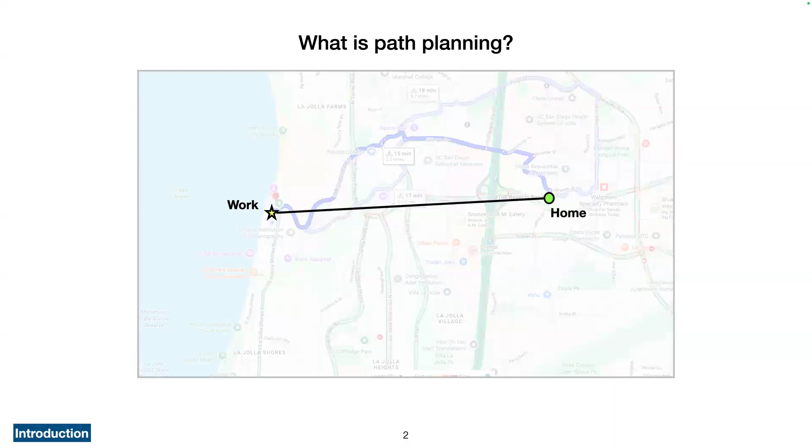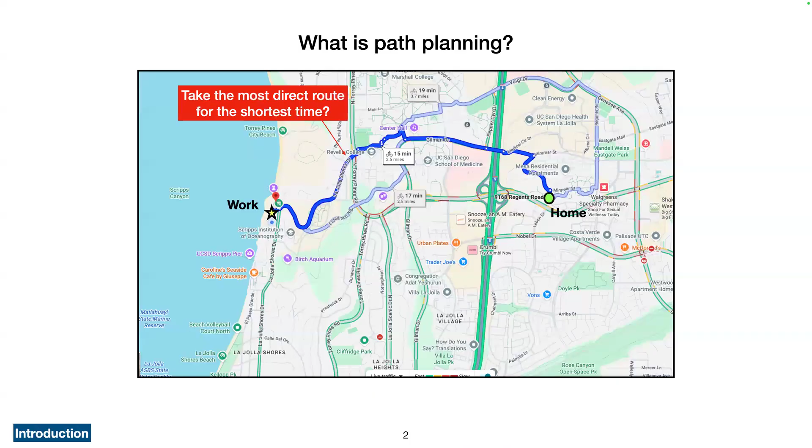If you're not familiar with path planning in the ocean, you might actually be very familiar with it in your day-to-day life. Every day when I wake up over in grad housing, I want to get here to Scripps in the fastest way possible, but I can't necessarily go in a straight line. So maybe I'll ask Google Maps how to get there, and this is the way I usually take. It's the most direct and it's the quickest, but I could also think about optimizing for something else.

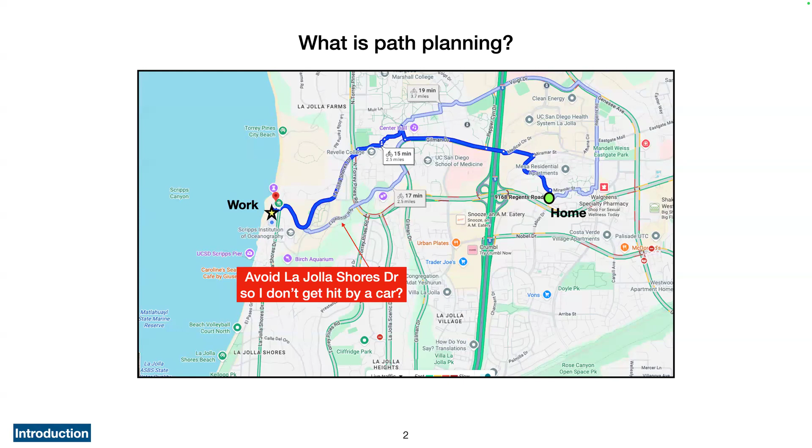Maybe I want to avoid the most congested parts of campus, or maybe I want to take some side roads to avoid traffic. Either way, I have different options to get from point A to point B. In the ocean, we have the same problem, but instead of dodging cars or switching streets, you have to deal with moving through a fluid that is in itself moving.

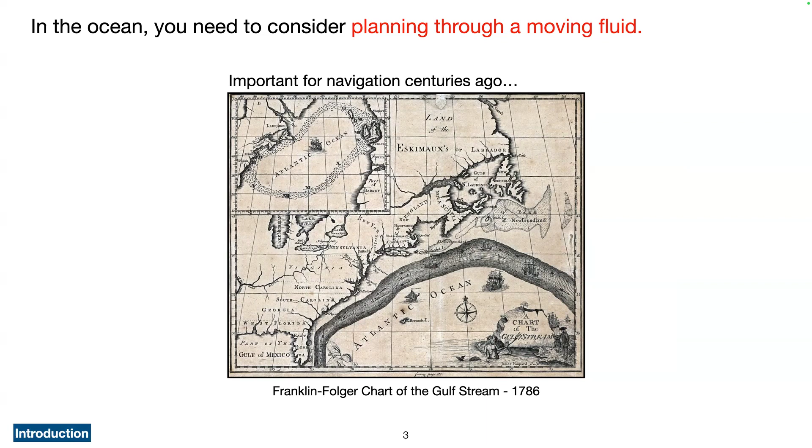This is a problem we've been thinking about for hundreds of years, and this is actually a chart from Ben Franklin back in the 1700s, where he was corresponding with local ship captains, talking about how they could use the Gulf Stream to more efficiently navigate between the US and back to England. On the way there, you might want to ride through this current, and on the way back, most importantly, you want to avoid it so that you can make way and be efficient.

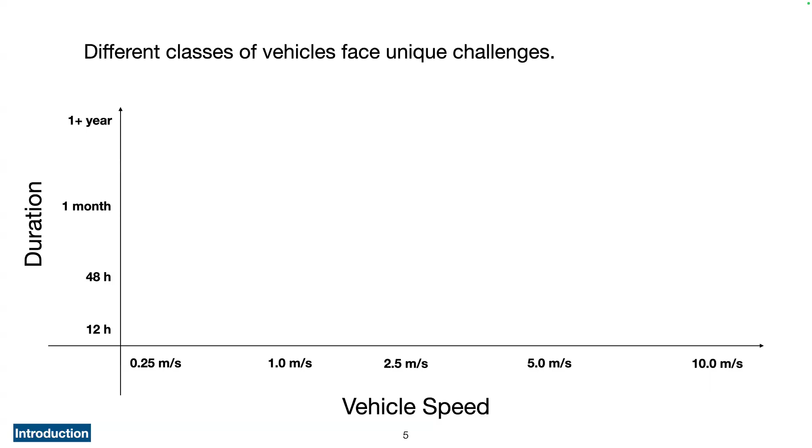When we think about planning, we also want to think about which vehicle we're considering for the problem. We can classify vehicles by their speed on the x-axis and duration on the y-axis. Planning for something like a container ship that's going very fast and might be out for about a month is going to be very different than piloting an environmentally propelled system like a wave glider or Slocum glider, which you can see on the top left, where they're going less than a meter per second, but can be deployed for over a month and up to over a year.

What we're going to focus on for most of the talk today is a propeller-driven AUV. These are vehicles that are a little bit more agile than environmentally propelled systems, going nominally about a meter per second. They can be deployed for around anywhere from a few hours up to 2 days.

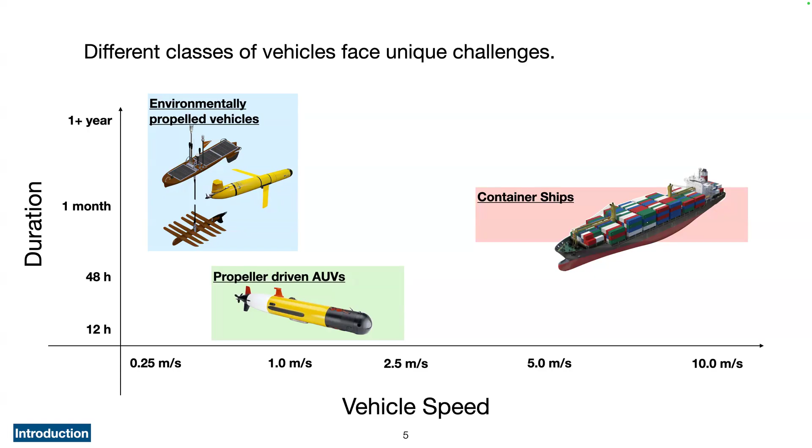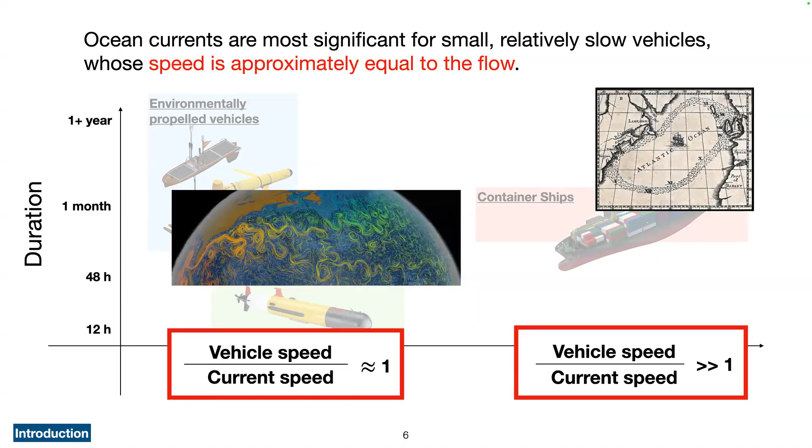This is because we need to think about how fast they're going with respect to the ocean currents and how we might need more information given these slower vehicles. For a container ship, or back in the day where a vehicle is going much faster than the current speed, planning is maybe not as hard or not as interesting. But here, where the vehicle speed is on the same order of magnitude as the currents, we can really start to care about all this small scale dynamics in the ocean.

We're talking about planning through a vector field, so either wind or ocean currents, which represent a flow that changes over space and time. He talked about a ship that moves with constant velocity relative to the surrounding air mass. Our vehicle or ship, its velocity is going to be the sum of wherever it points, plus the ocean currents at that position. Then the goal is: how must the ship be steered in order to come from a starting point to a given goal in the shortest amount of time?

We're still using this almost exact problem formulation with two material changes. First, we're going to be considering vehicles that have control over their velocity, so it can choose both its direction and speed through water.

This naturally leads us to talking about paths that minimize energy. If you want to get somewhere in the shortest amount of time, you'll drive the vehicle as fast as it can go. But if we want to minimize energy, we might speed up or slow down depending on what the ocean currents are doing around you.

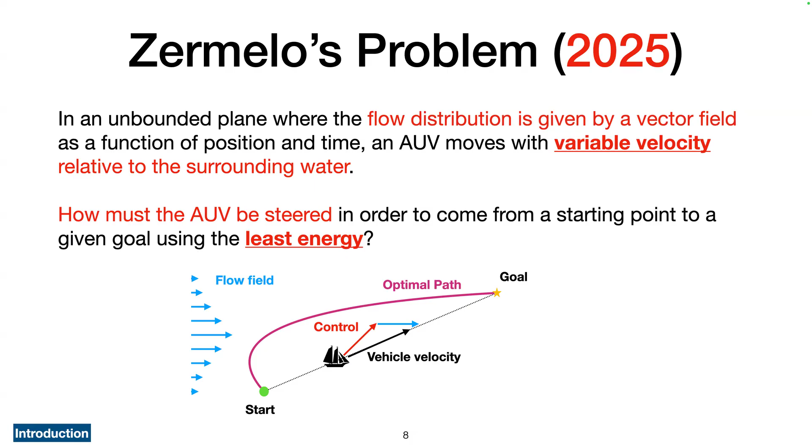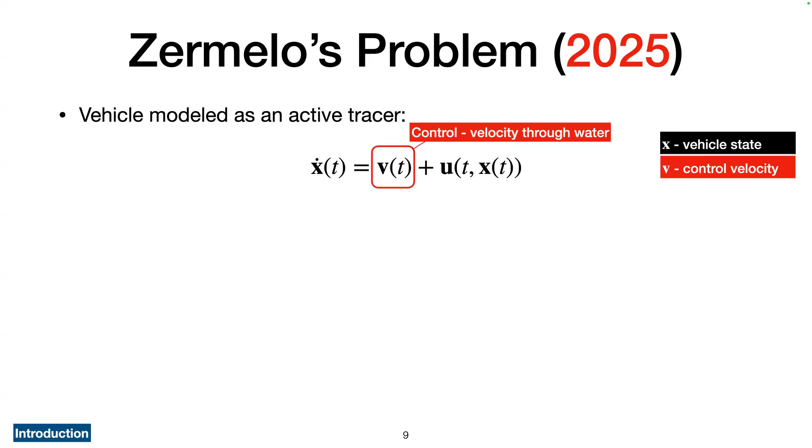If we state this more precisely, the vehicle's state or position x, and therefore its velocity, is the sum of v, the control, with the ocean currents. That might be a function of time, as well as the position the vehicle is at.

We're going to consider an energy consumption model with two terms. The first is dynamic energy consumption, changing as a function of time based on what you're controlling. That's the magnitude of v to the power of 3, scaled by alpha, the dynamic power coefficient. This is a function of vehicle geometry, so hull size, drag coefficients, things that can be calibrated to a specific vehicle.

Beta is going to be a term that's constant in time, representing the hotel load — all of the power you need to keep a system up and running, be that command and control, onboard computing, or other sensors.

The problem we're solving is to find V star, the optimal control as a continuous function of time, which minimizes total energy consumption. We're integrating from the given start time to an unknown end time, but we specify where the vehicle starts and ends.

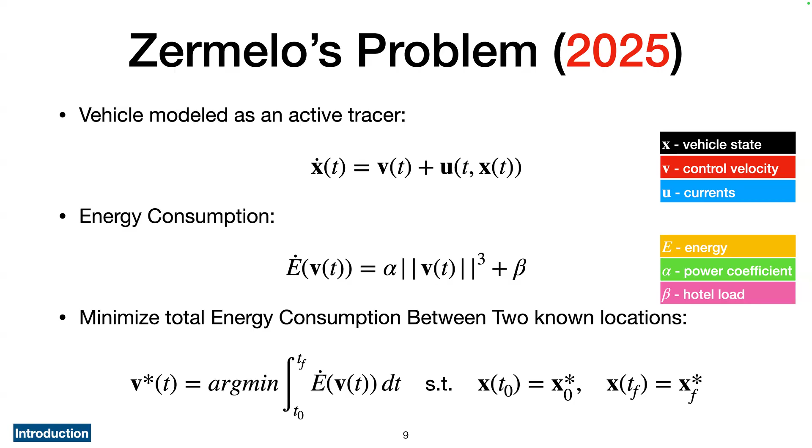This is a very well-studied problem. In the last 10 years or so, there's been a lot of development finding solutions using complicated partial differential equations that govern the evolution of what we call a level set.

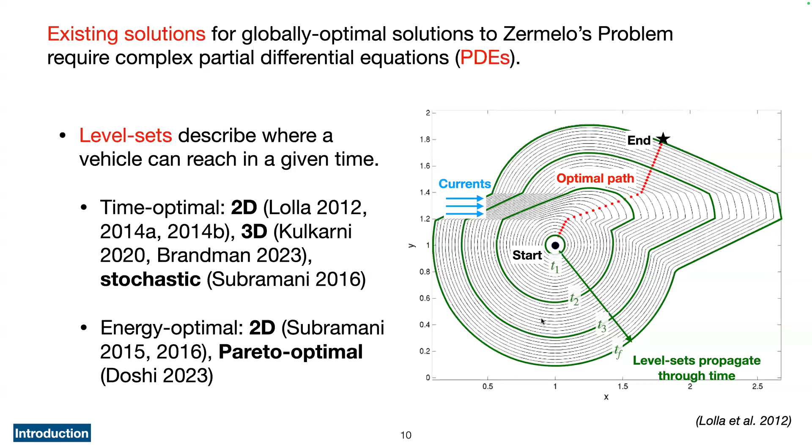These have been developed a lot over the past 10 years, starting by Lolla et al. in 2012, and they've been extended to three-dimensional currents, uncertain currents in 2D, and more recently to energy-optimal solutions, both in 2D and for a Pareto optimal solution trading off between time and energy.

Why they've been so successful or widely adopted is because they're very rigorous — provably optimal and complete, meaning that if a solution exists, the algorithm will find it, and it's guaranteed to be globally optimal. It'll give you back the path that is much better than anything else.

Another way to approach this problem is by formulating our solution in the form of ordinary differential equations, or ODEs. This is the technique we're going to be talking about a lot in Chapter 1. The major pro is that they're much more computationally straightforward.

We can shoot all of these out in parallel in a much more straightforward fashion, and we can find an optimal trajectory like this red option that starts from the starting point and then reaches our desired goal point.

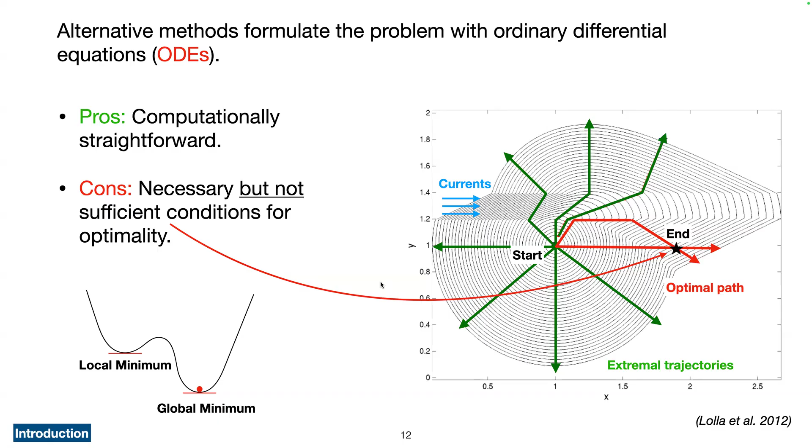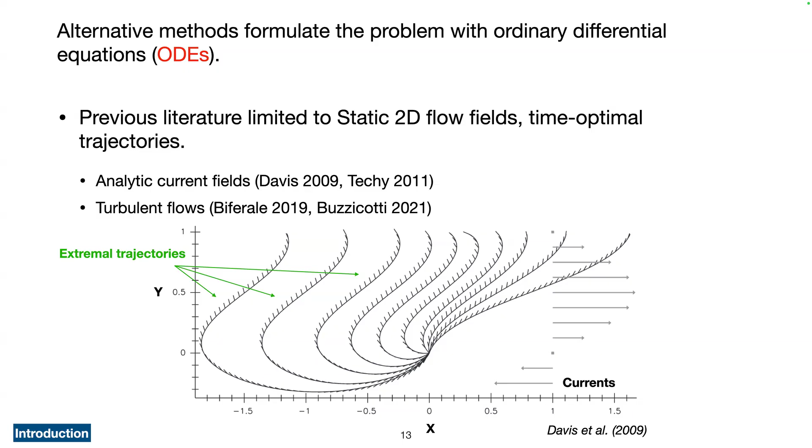These have been studied in the ocean, but in a much more limited sense with respect to the level sets. This is a very nice figure from a nice paper of Russ Davis here at Scripps a while ago, where he demonstrated these methods in analytic current flows or flow fields. So far, they've only been developed for static two-dimensional flows and for time optimal trajectories. We're going to build off of this in the first chapter that I'll share later.

The methods we've discussed so far require global information about the environment. So if we look at the schematic below, we know about the currents everywhere, including forward in time. We might know where there are obstacles like islands or keep-out zones. With all of this information, we want to be able to find a globally optimal path. Practically, this is useful if you have a good forecast, right? So you need to be able to trust your forecast explicitly.

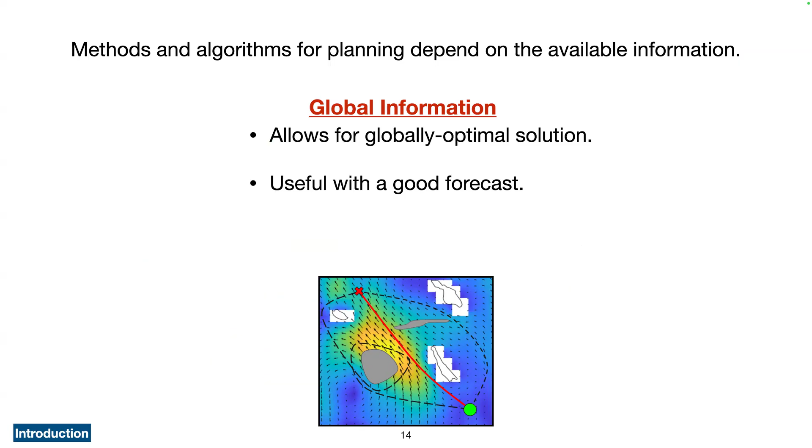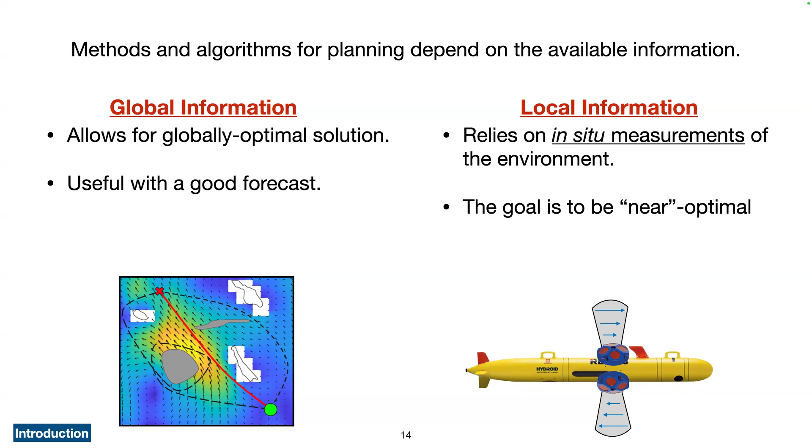On the other hand, if you're operating in an environment that doesn't have a forecast, or doesn't have a forecast you trust very far into the future, you want to make decisions based on local information, allowing you to still be intelligent when you can only sense the currents from the vehicle. In this schematic, we have an AUV equipped with an acoustic Doppler current profiler, which might allow you to measure the currents in situ. Because you don't have all of the information, we want to develop methods that are near optimal, but of course they're most likely not going to be as good as the globally optimal solution.

With a little bit of background, today I'm going to be presenting three chapters of my thesis, all on this problem of energy optimal trajectories for point-to-point transit. The first chapter is going to be focused on globally optimal solutions, extending those ODE-based methods we talked about a little bit before.

Then in chapter 2 and chapter 3, we're going to move towards onboard planning. In chapter 2, we're going to do this with a machine learning, data-driven framework, and focus on planning in horizontally varying currents, so a vehicle either at the surface or at a constant depth. In chapter 3, we're going to design a behavior that's more motivated by the sensing capabilities we have on an AUV today, and think about how we can plan vertically, taking advantage of how ocean currents vary as a function of depth.

So if we start with chapter 1, titled 'Energy Optimal Path Planning for Autonomous Underwater Vehicles with the Maximum Principle' — this paper is currently in review at IEEE JOE. What we're going to rely on for this work is a classical tool from optimal control called Pontryagin's maximum principle. The main thing I want you to take home is that this method is going to enable us to formulate our problem as a two-point boundary value problem for ordinary differential equations. So PMP is going to tell us what differential equations to solve, and numerically we just want to find these boundary conditions.

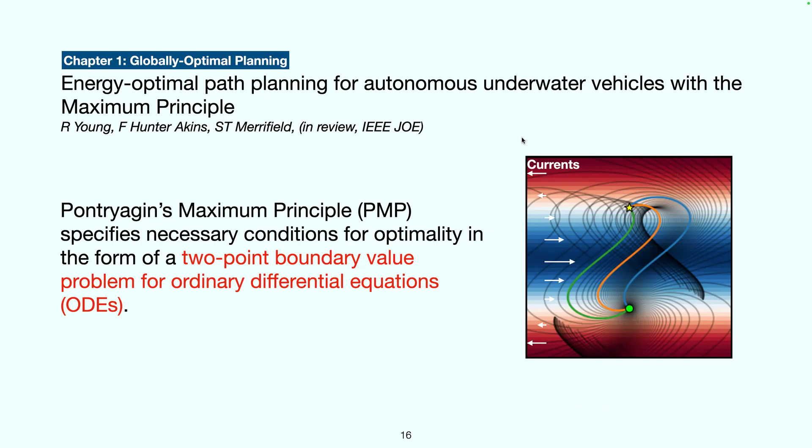We'll go through this figure later, but keep it in your head: if you can see my cursor on the right, we have a boundary condition at the start — the green dot — and we're trying to find trajectories that get up to the yellow dot. We have ordinary differential equations that are going to govern all of these shaded gray lines in the background. We want to find the trajectories that connect the two points, and then we'll be able to evaluate those for which one is our globally optimal solution.

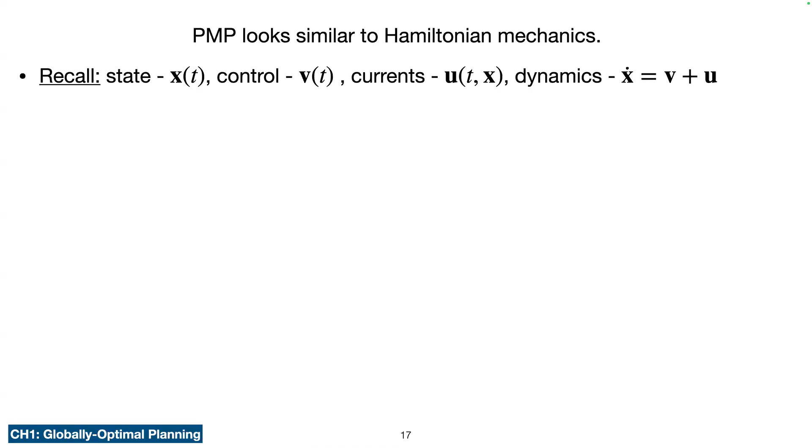So if we go through the equations a bit more formally, and this might look familiar if any of you are familiar with Hamiltonian mechanics or that type of formulation. Recall our problem statement where x is the state, v is the control, and u are the currents.

And then our dynamics are the control plus the ocean currents at a given point. We'll define two new variables. So p is the adjoint vector, which is in the same dimension as the state. And then our Hamiltonian h is how we enforce our minimization or maximization, how we enforce our optimization quality.

So we have one term in the beginning that's looking at how our dynamics are aligned with the adjoint vector. And then we keep track of our cost function, or our running cost, which is energy consumption, as you saw in the previous slide.

PMP tells us that the optimal control is the value of v that maximizes the Hamiltonian at any given time. And we'll notice that our control in terms of direction is just going to point in the direction of our adjoint vector. And then the optimal speed is only a function of its magnitude and our dynamic power coefficient.

And lastly, the boundary value problem that we can solve is defined by a coupled set of ordinary differential equations. So we have dynamics for our state, which was given before, and then we have dynamics for our adjoint vector. And we have the same boundary conditions that we had before, but we have a third additional boundary condition on the Hamiltonian at time tf.

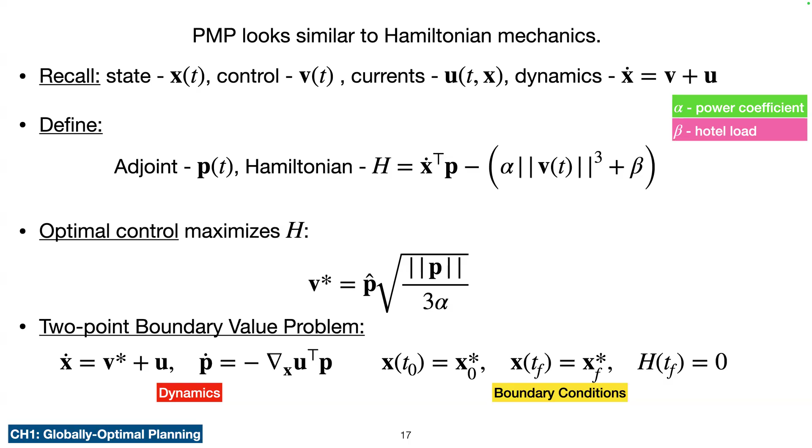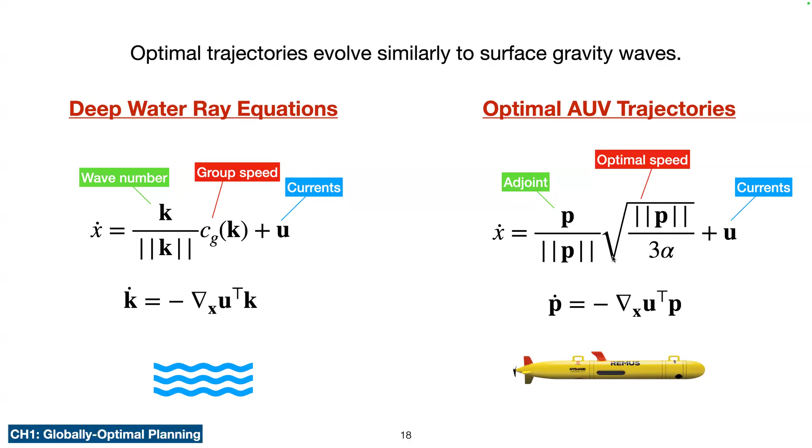Additionally, the way the wave number updates is exactly the same as the way an adjoint vector updates, and that's going to be given by the spatial gradient. This nabla x is the spatial gradient of the ocean current field. So your vehicle is going to change its direction as long as there is some gradient in ocean currents.

And so the way we use this formulation to actually generate solutions, and why it's useful, is that it turns our optimization problem into a finite dimensional root finding problem.

So the fastest way to get anywhere in a flat domain with nothing going on is just to walk in a straight line.

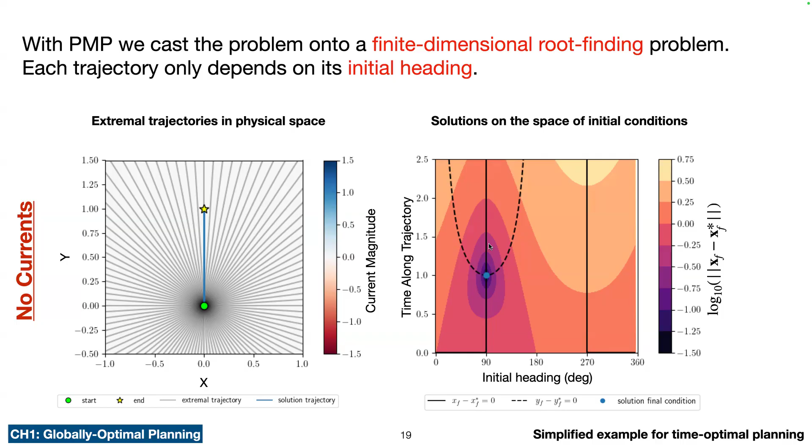So we see in this case, right, there's one solution. It's a rather simple environment. So if we take an initial heading of 90 degrees and we propagate it for unit time, that point through our dynamics is going to map back onto our trajectory in physical space.

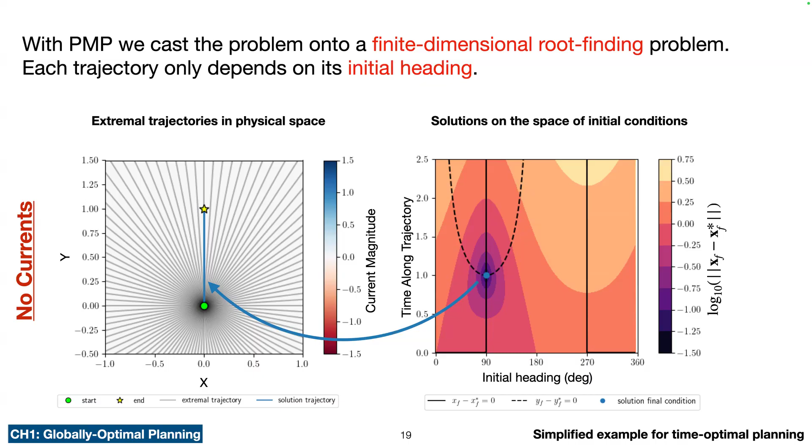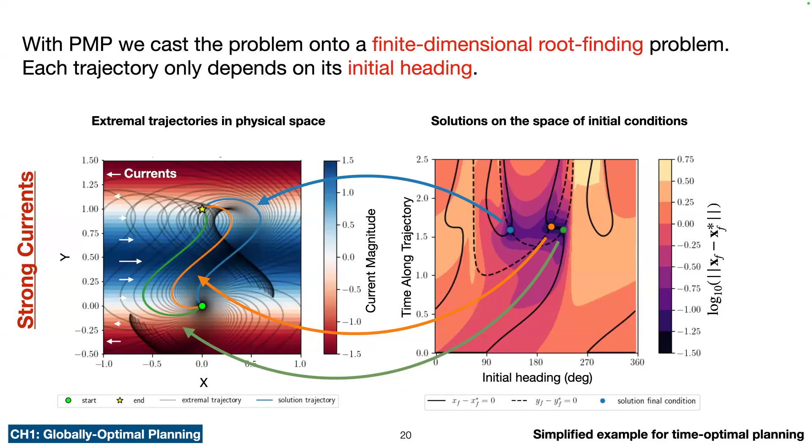So hopefully that gives you a little bit of intuition on how these things are steered or maneuvered in physical space. But we can also use this method to think about the optimal speed. So again, where I want to minimize energy, we're allowing our vehicle to speed up or down.

And it kind of reveals this parameterization that we'll call the magnitude v naught star, which is the optimal speed of a vehicle in no currents. That's going to be dependent on our hotel load and dynamic power coefficient. So what this means is that you might have different vehicles with different configurations, but as long as that ratio is the same, they'll want to go the same speed in no currents.

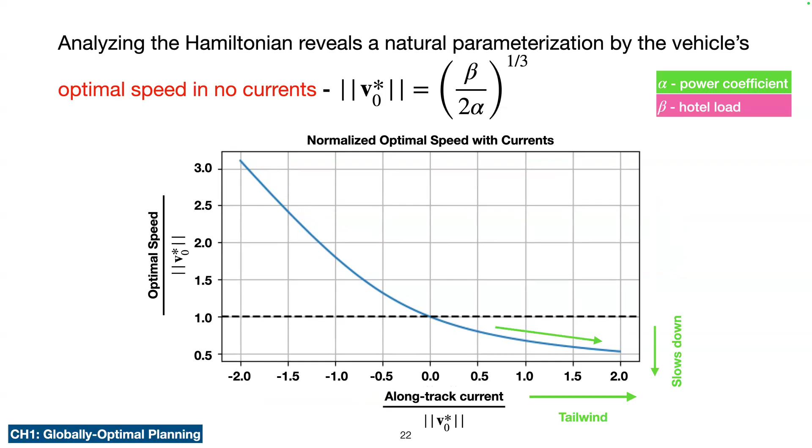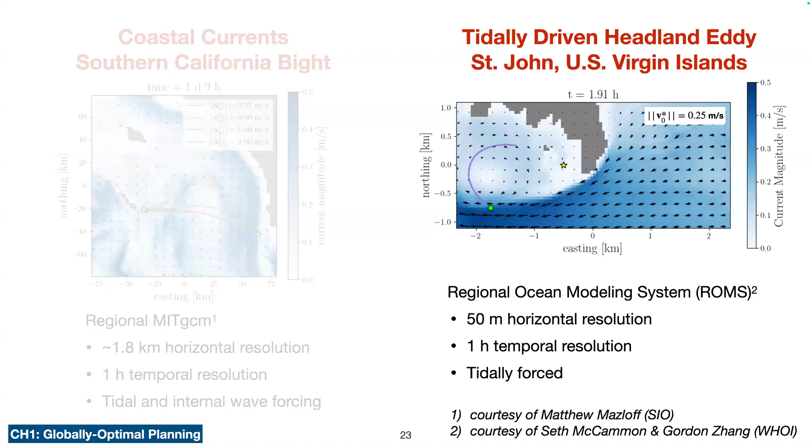We also demonstrate this method working in a much smaller and more dynamic environmental regime. This is an output from ROMS near St. John, U.S. Virgin Islands, courtesy of Seth McCammon and Gordon Zhang at WHOI. You'll see here we have intense tidally driven flow flowing past this headland, creating a strong eddy that spins up and slowly advects out of screen.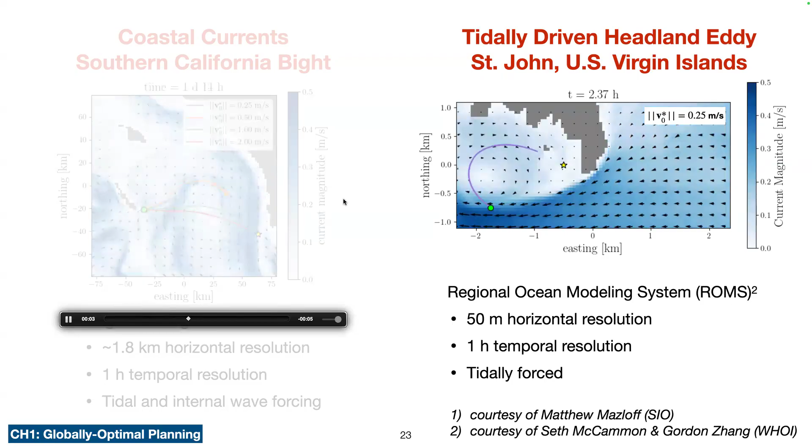So for a slow vehicle that wants to go about 0.25 meters per second, in the beginning it can't even make way towards its target. And so it's going to take a large detour up and around the eddy into the lee of the island until it can finally wrap back around.

So in summary, and especially for the sake of this talk, chapter 1 really is a way to develop new methods focused on energy optimal path planning using ordinary differential equations for their computational advantage. And we're going to explicitly take advantage of this in chapter 2 by generating a large ensemble of optimal trajectories, which we can then use for some machine learning.

And so after this chapter, the next two things, just as a reminder, are going to be focused on onboard planning. So what can we do if we don't know anything about the environment beforehand and we just want to depend on our sensors?

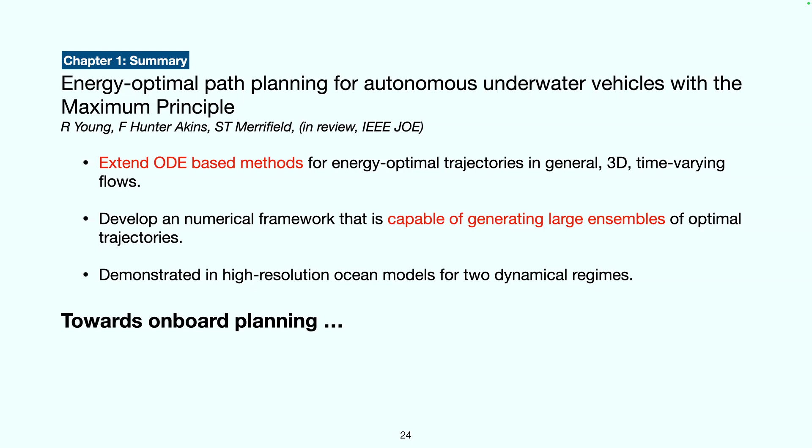So chapter 2, titled Energy Optimal Path Planning for Autonomous Underwater Vehicles via Imitation Learning and Transformers, which is currently in prep. The two words I want to key on are imitation learning. That's going to be our form of machine learning, where we're using methods from chapter 1 to generate a large ensemble of optimal trajectories. These are going to be sort of what we want our model to mimic, so that's the expert behavior we want the model to imitate.

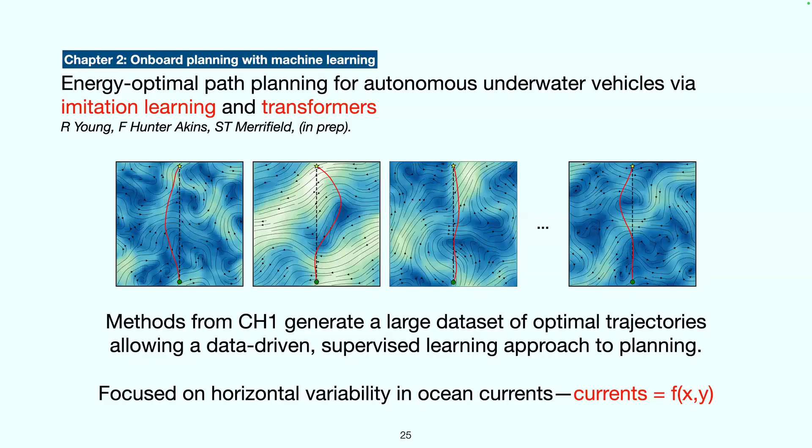And then transformers are the type of model architecture we're going to use. If you've heard the terminology before, they've gained a lot of popularity in recent years doing natural language processing or for LLMs, and they're useful to process information in sequence. So that's how they're going to relate to optimal control. And just to call out, in this chapter we're going to be focusing on planning in the horizontal, so currents that only vary as a function of x and y and are stationary in time.

So we want to train some sort of machine learning model. First, I just want to talk about what goes in and what comes out. On the left side are our inputs. So for each trajectory, we have its time along the trajectory. We represent its state in terms of a distance and heading to the goal, as opposed to just x and y.

The vehicle, we assume, can sense the currents at its single point in space, and we'll rotate those into a cross track and an along track reference frame. And then we have our last variable, which is energy to go. This is the only thing that can't be directly sensed in situ, but we're going to use it as an estimate to sort of drive the model. So all you need to do is provide the model with how much energy you think it might take to complete the rest of the trajectory, and that's how it's going to learn what to do.

We're going to predict two control actions. So again, it's going to be the magnitude and direction of our vehicle, and we're going to predict them in these polar coordinates.

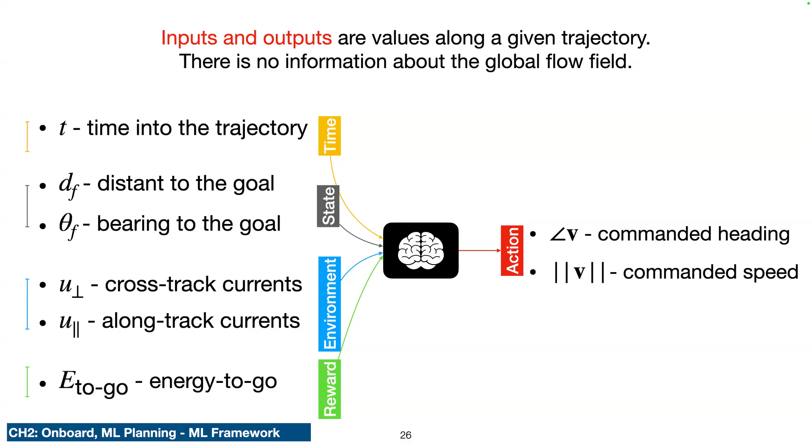Okay, and so we want to use these transformer models, which process sequential information. We're building this off of a recently developed decision transformer by Chen et al. in 2021, which was then applied to some aerospace work last year by Guffanti et al.

The main idea here is that we take all of those features, so again our reward, state, environment, action, we stack those up in sets of 4, and those are going to repeat along the trajectory. So that's how we're inputting our information into the model.

Now our model, from this sequence, it's trained to predict one step at a time. So from the state element, if that's the last element in the sequence, it's going to predict the environment. This is our loss function at the top, which will build up as we're training. So the model learns to predict something about the environment.

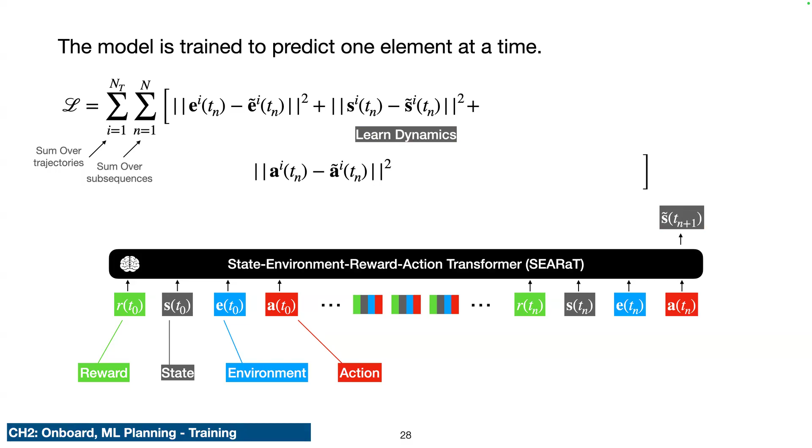Next, from the environment element, it's going to predict the action, so obviously we want our model to learn the optimal control. And then from an action, we want the model to predict the state, so you want the model to learn something about how the dynamics of the system are working.

Lastly, we want to add some regularization so that we might tune the behavior of our model. Originally we were noticing that the machine learning model would drift in realistic ocean currents. So we're going to add this regularization parameter lambda that weights how we want to learn optimal control against how we want to learn just going in a line.

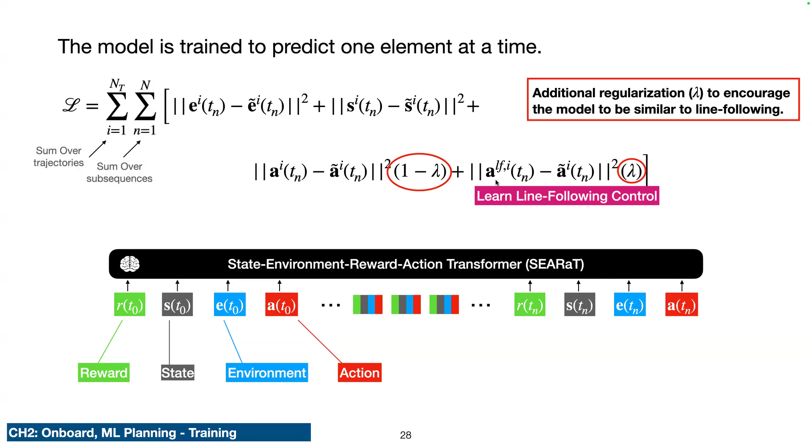If we know the currents and we know where we are and where we're trying to go, we can calculate just the control that it takes to go in a line. When lambda is 0, we're just learning the optimal control. In the limit that lambda equals 1, we're telling the model we don't care about the optimal control, we just want to learn line following.

So, a brief note on training: we're using what's called teacher forcing with a single step rollout. What that means is as we're minimizing this loss function over our data set of all the trajectories and subsequences up to the point of prediction, the model is fed a ground truth sequence. So it's never learning to actually predict out a whole trajectory. It takes a ground truth and predicts one step out in time.

It should be an emergent property that once the model is actually driving, it can stitch together these predictions to make a sensible path. But it's not actually predicting or training based on full trajectories.

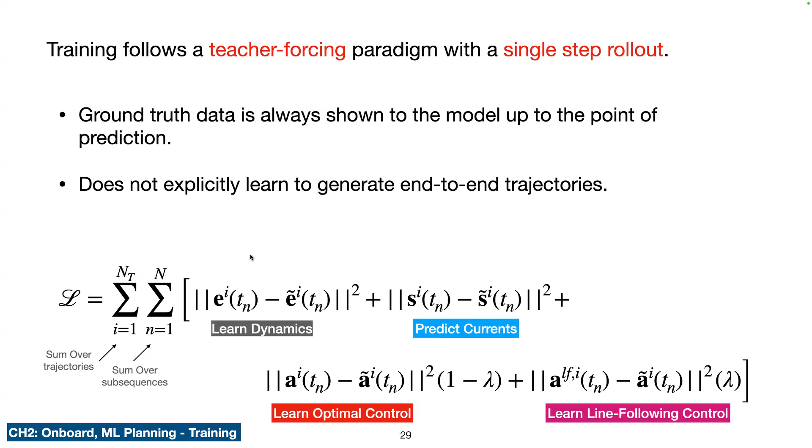So we have our model framework. We know what we want to put in. We know how to solve for optimal trajectories, but we want to generate our data set in a way that we can simply and efficiently generate many instances of ocean currents. Because we're doing something with supervised learning, we need a lot of data. To do that, we're going to use a framework where we're training on synthetic currents.

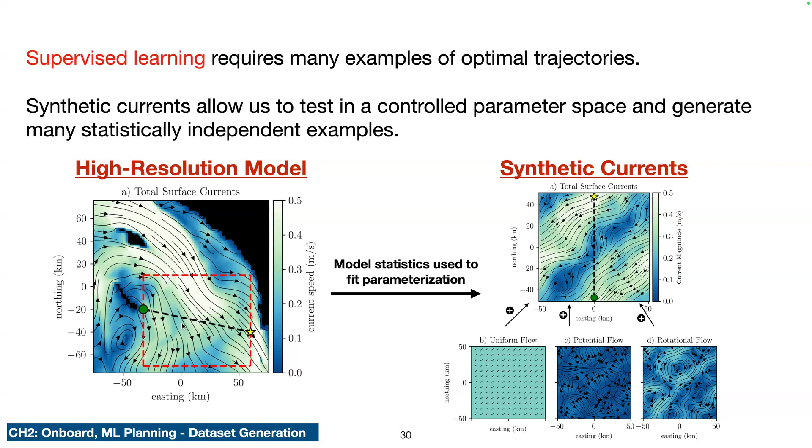The statistics for each of these three things are fit to our operational area in Southern California. Once we fit these statistics, we can generate many instances of the flow, therefore many versions of optimal trajectories. That allows us to test our model back in the realistic ocean currents. But we never use the model to actually train.

To drive home why we're doing this: we're going to end up training on 8,000 different independent samples of an ocean flow, whereas in Southern California, even though we have 2 years of hourly data, if we look at the temporal autocorrelation and do some subsampling, we can only get about 300 independent realizations.

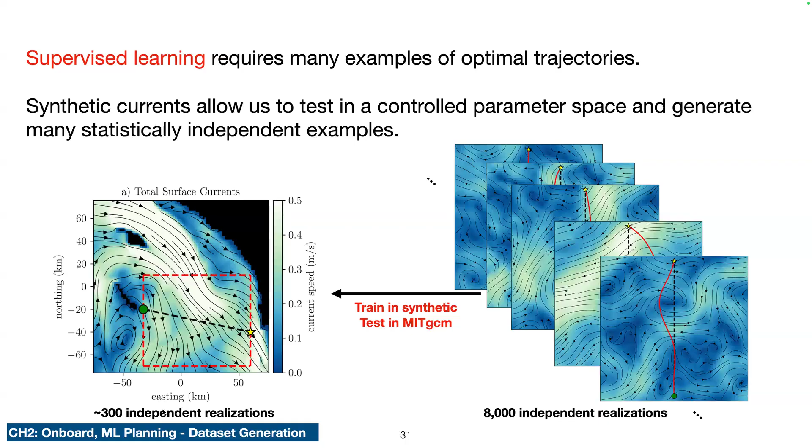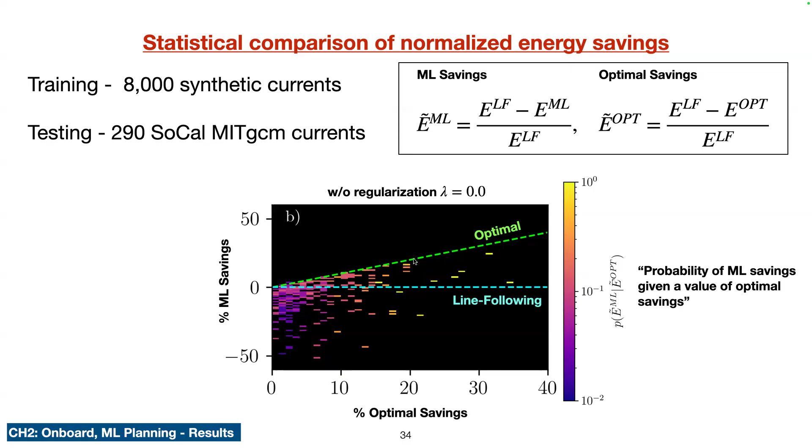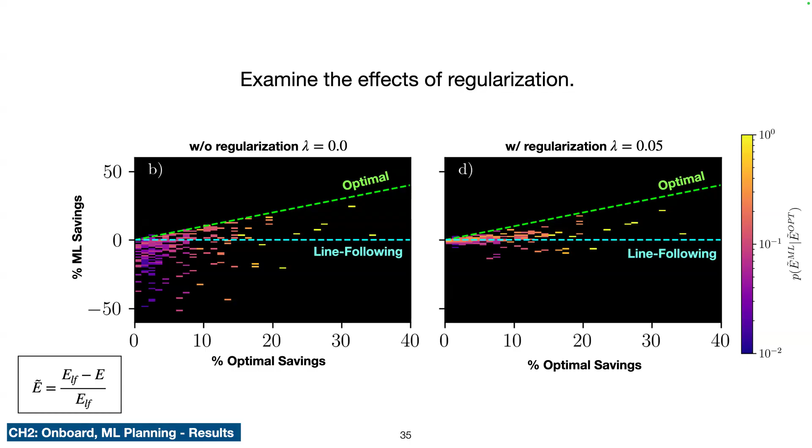So we're going to compare the effects of regularization. So on the left, we have a model without any regularization. On the right, we have regularization with lambda equals 0.05.

And if we focus on the one on the left, right, you'll see that we're not doing very well. And so we actually see that a lot of the data set offers sort of minimal optimal savings, right?

So the gap that we're trying to shoot for between this green and blue line is very small, and any deviations that the machine learning is going to make end up being punished and sort of actually being worse than line following. So this is representative of sort of a lot of situations that look like this, where we have weak currents, and therefore the optimal thing to do is actually more or less go in a straight line.

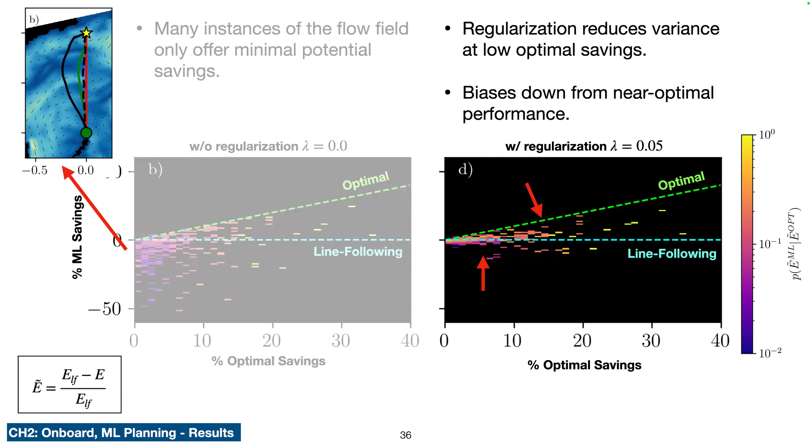However, once we add a little bit of regularization, right, and tell our model that it's okay to be more similar to line following, we get a variance reduction. So we decrease a lot of this spread underneath the cyan line. We push everything, or we clean a lot of it up, but we also get a bias down in performance.

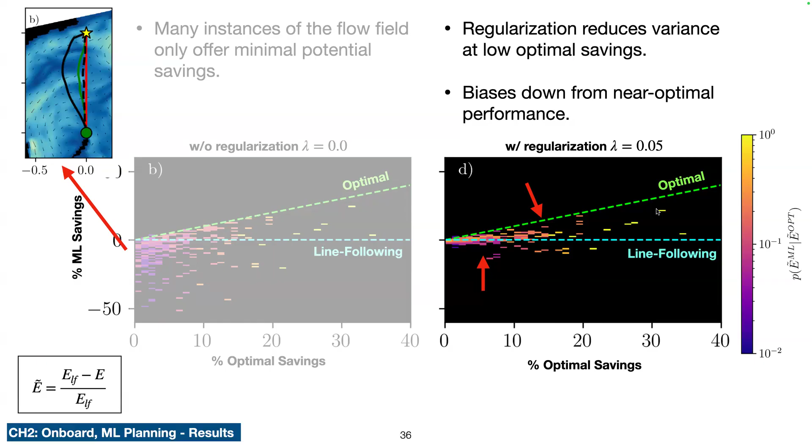So when there is more energy to be saved, so further to the right, we get data points that were sort of along that optimal line, so almost near optimal, get biased down and away. But we do see overall that when there is more energy to be saved, the machine learning model is able to take advantage of that.

And so in summary, we developed this machine learning framework to train off of a data set of optimal trajectories. And more so, we do this training in synthetic currents, and we demonstrate its success in an MITgcm.

So on average, we understand a little bit more about the upper bound, so what we're sort of striving for. So true optimal in this environment saves about 5% of energy and up to 20 or exceeding 20% in the most favorable currents. And this was for a nominal trajectory of about 100 kilometers in a vehicle with a nominal speed of about

0.75 meters per second. And lastly, with the machine learning model with some regularization, we find that on average, we're doing just as well as line following, right? So it's at least robust in that sense. But when we do have favorable currents, so when there are optimal savings to be had, it's able to achieve them.

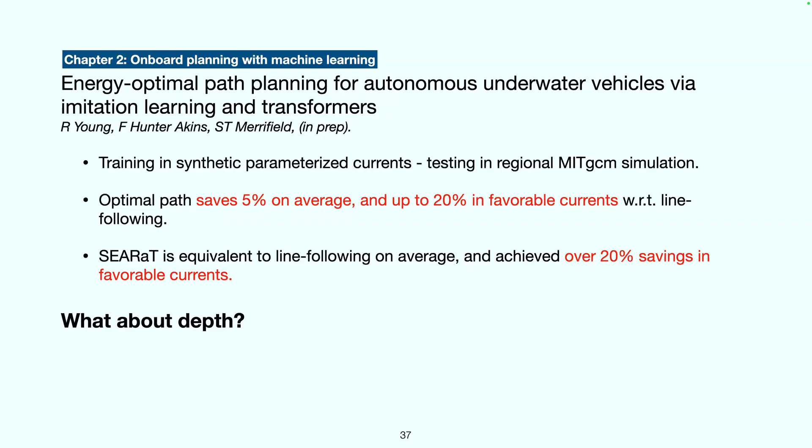So for the last chapter, titled A Greedy Depth-Seeking Behavior for Energy-Efficient Transits by an Autonomous Underwater Vehicle, this paper was published last year in JOE.

We're going to focus on planning in the vertical, or looking at how currents change as a function of depth, and how we might exploit them to save energy.

The keywords here being greedy, which we'll say is sort of a locally optimal view, meaning that we're not looking into the future at currents, we're not looking at what happened before, we're just making a decision based on what we're sensing right now. Again, we're focusing on vertical variability. So the currents here are a function of, we'll say x is along track, z is depth, and they're also varying in time.

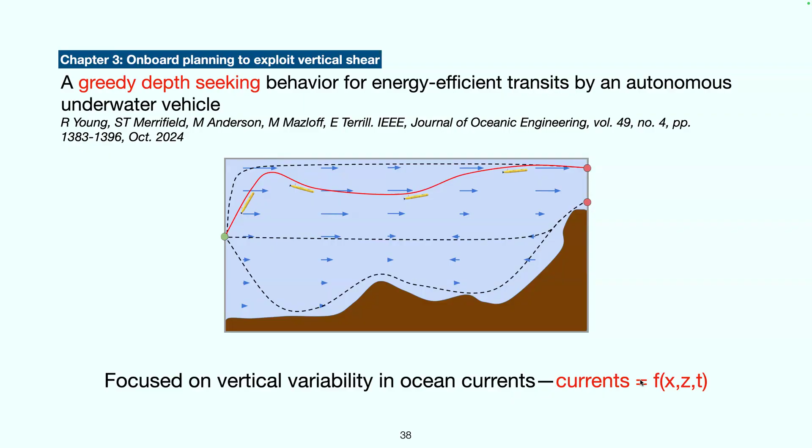So before we talk about the behavior, we can talk about a little bit of what's going on in the environment that our vehicle might be able to take advantage of or should consider when planning.

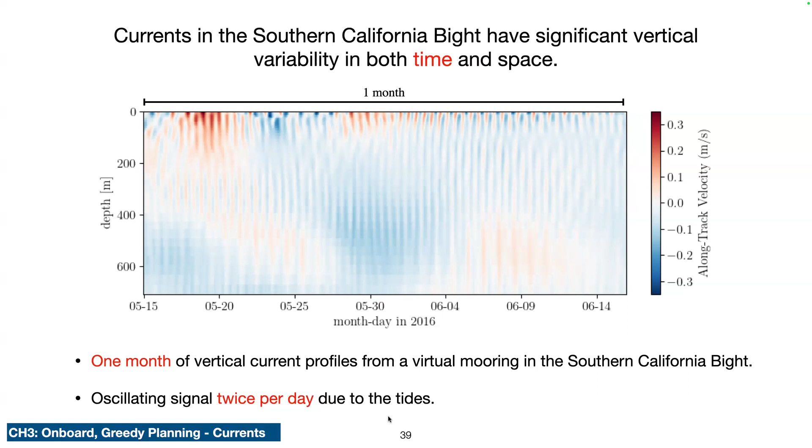So our behavior is going to be based on minimizing energy consumption per unit distance, or dE/dX. This is building off other work in our group by Justin Chang in 2022 and Mark Anderson more recently, where they've developed this power model, calibrated it to some of our vehicles, and then looked at changing the control of our vehicle during constant depth operations based on the same value.

So dE/dX, you can think about like miles per gallon in your car, just inverted. So we want to get the least amount of dE/dX, and that's going to be our power over speed over ground.

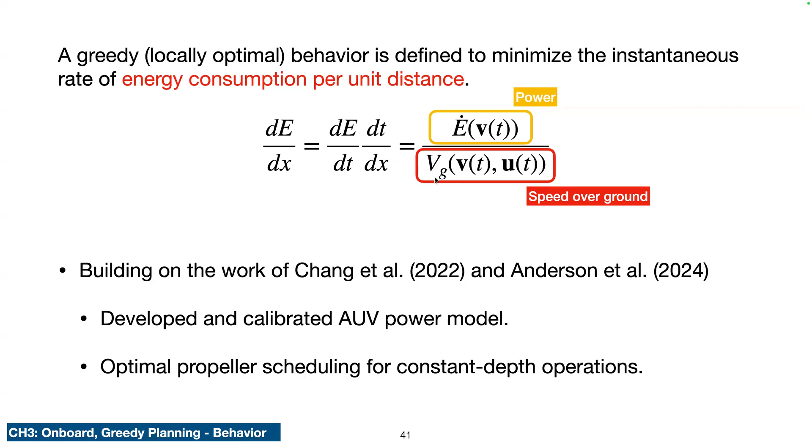Just a quick note, because we're making the vehicle travel in a straight line horizontally and just changing in depth, the two control parameters are propeller speed, which maps directly onto its speed through water, and then the depth, which will give you a different value of current based on where you are. So again, our power is a function of propeller speed, and our speed over ground is a function of prop speed and depth.

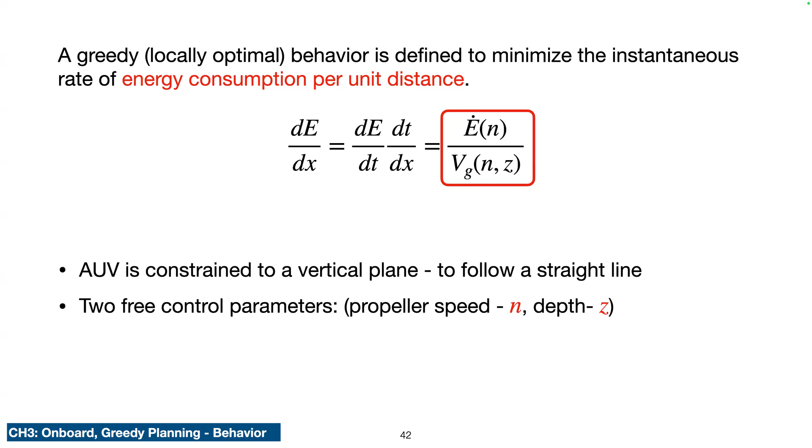So the behavior works in three pieces. First, you're going to sense the currents, and we're designing this behavior for an AUV that has an upward and downward facing acoustic Doppler current profiler. So it's going to be able to sense ocean currents above and below the vehicle with some limited range. Once it takes a measurement of ocean currents, it's going to calculate what is the potential dE/dX if I were operating at any of those depths that I was just able to sense, and then operating at any RPM that's within my range.

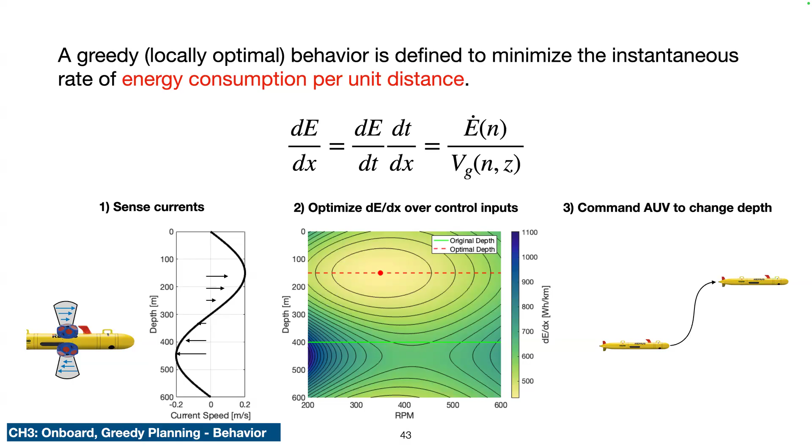Once we do that calculation, we can just pick out whichever is best right now. So if we're starting at 400 meters, this would tell us to move up in the water column to about 150 meters, where we have this strong along-track current, and operate at around 350 RPM. Once it does this thinking, that command is sent to the vehicle, which changes depth and adjusts its prop speed accordingly. All of this behavior is looped through and done repeatedly as we complete a transit from start to end.

So these are two examples, and we were analyzing this behavior with respect to a realistic sensing aperture. A 1200 kilohertz ADCP is able to sense about plus or minus 10 meters above and below the vehicle, and that path is shown on top in red. On the bottom, this is going to be our upper bound or lower bound on energy. The best we can do is if we can sense the whole water column, so no matter where you are, you can always move into the most advantageous region. The background is colored by our dE/dx.

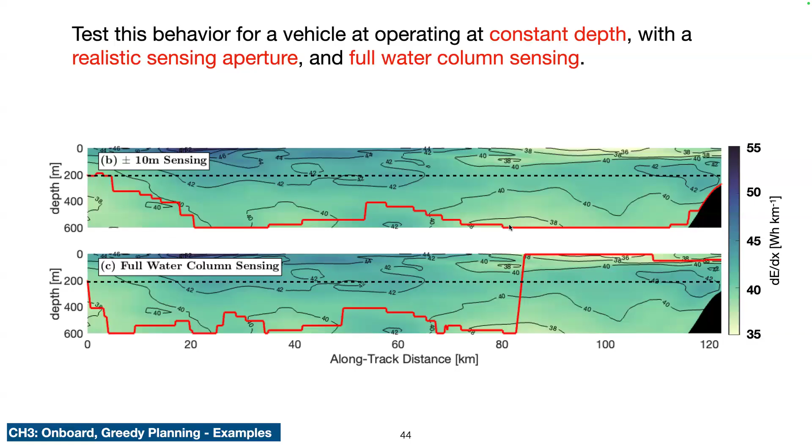So the vehicle the whole time is searching for these areas of light color. You can see the effect of limited sensing where around 80 kilometers, with full water column sensing, we're able to jump instantly up to the surface. The aspect ratio is off, so it's not truly instantaneous, but with respect to the length of the path, it's able to quickly get to the surface and ride these strong currents, whereas the vehicle with local sensing is more limited and stays at the bottom until it completes the trajectory.

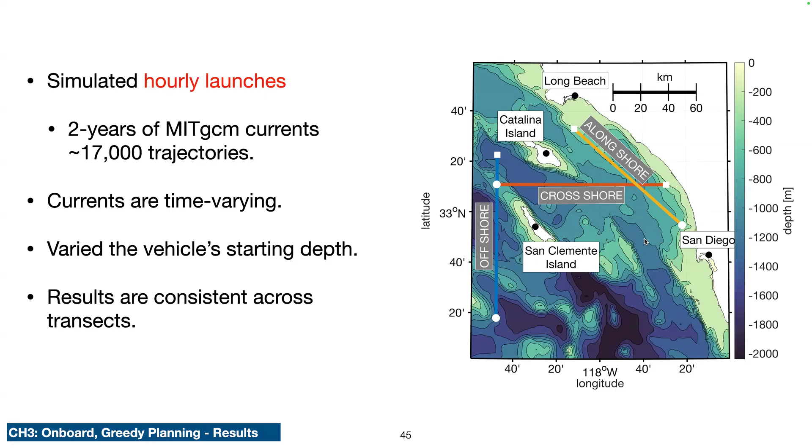In this paper, we looked at some statistics of these behaviors over the same two years of MITgcm output, which resulted in about 17,000 trajectories that we can compute statistics over. Again, the currents are time varying, and we also looked at the effect of where the vehicle started in the water column. Because we only can sense a limited range, it does depend on where you start. We were looking at three trajectories in the Southern California Bight: one offshore, one cross-shore, and one alongshore. In general, the results I'll talk about today are consistent across the transect, so we won't go into all of that detail, but we'll just show a few results.

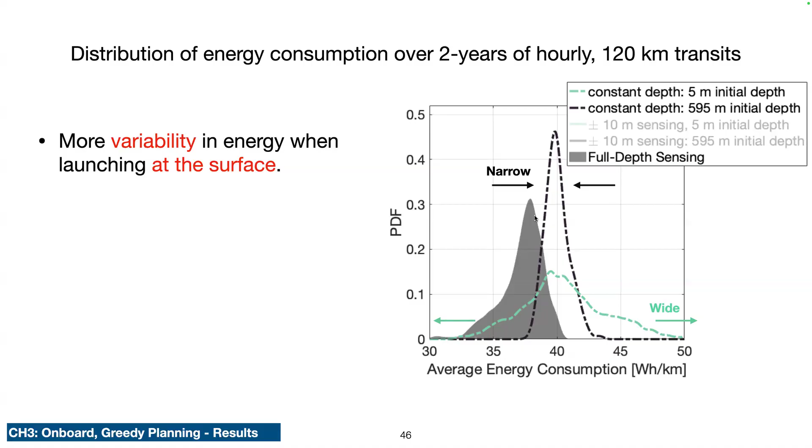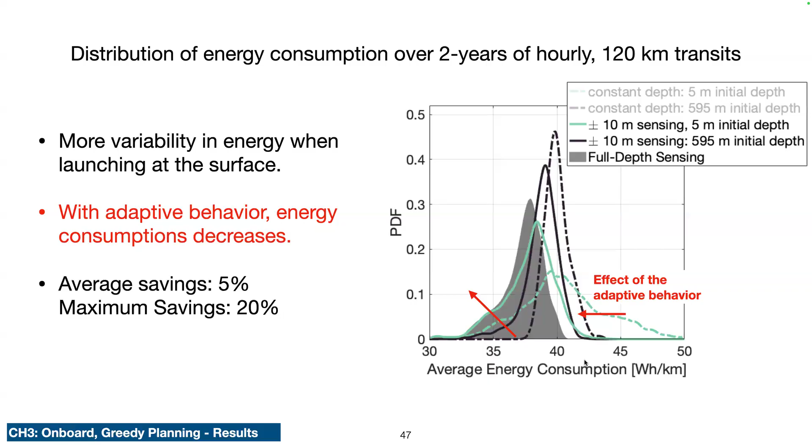The last thing we wanted to do in this work was see how the vehicle is actually responding to a physical process, and that ended up being tides. So the way we did this was by looking at a large data set of trajectories. We have 17,000 of these trajectories.

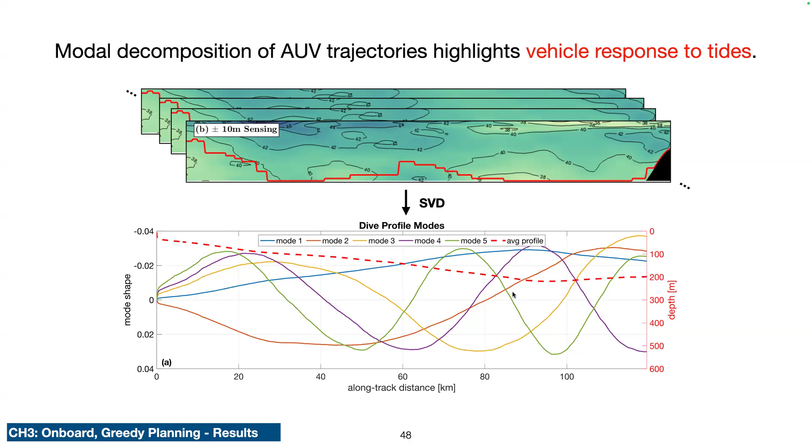These are trajectories of depth as a function of distance. We made a modal decomposition of that depth variability, resulting in these colored modes. We remove the mean, the dashed line, take an SVD, and each of these colored modes represents how the vehicle might dive or climb with different frequency. Then we analyze the amplitude of each of those modes, and specifically their frequency content, to get the power spectrum on the bottom of the page.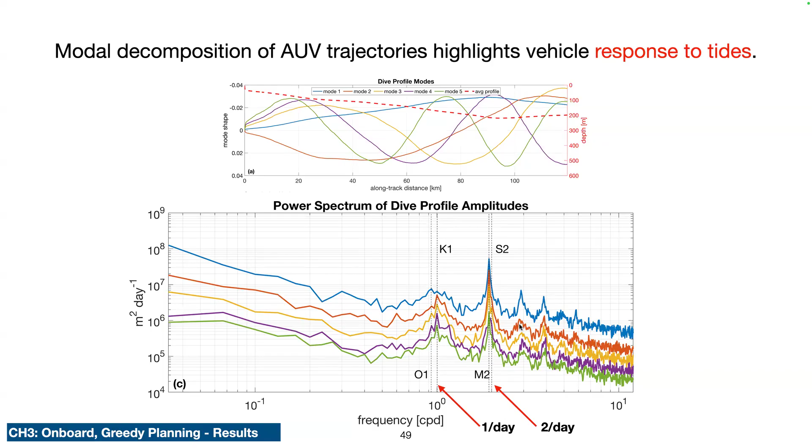The important part is that we notice that each of these modes has the same matching frequency as the dominant tidal constituents in the region. So if we're looking at launches hourly across 2 years, we actually see the vehicle makes decisions at the same frequency as the tides in the background. We believe that was the dominant feature that this behavior enabled you to key off of to adapt and save energy.

It's going to complete a dive to build up more environmental knowledge. So after it builds up a profile of the currents, we can do our DEDX calculation and pick the optimal depth to operate at. On the first 2 transits, it's going to choose a shallow depth. Then when it flips around, the same shallow depth would now be a headwind, so it's going to operate at depth.

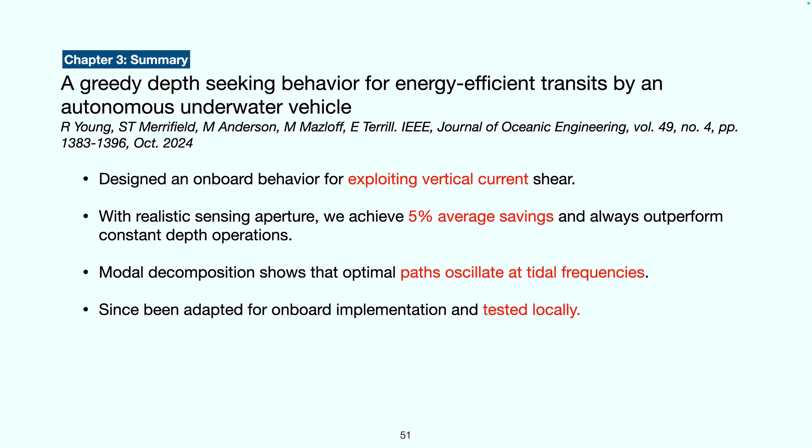So to summarize and take a step back, I just want to say that while we've worked on different pieces of this, they all fit in a larger system of an autonomous vehicle that all of this work we're doing in our group and other people around the country are contributing to in parts. I've gotten the chance to work on a bunch of different parts of this puzzle besides what I've just presented today.

I've gotten to work a lot with vehicle modeling with Mark's work, doing power modeling for both the Remus, and then some work with Ryan and Andre on the wave glider. Again, chapter 1 was about this global optimization for optimal trajectories. All of this can be done in practice in terms of pre-planning, as long as you know what the vehicle does and have a good forecast, you might be able to find something that a vehicle should do once it goes in the water.

But of course, it's not in the water yet. So then we have to deploy. We might go out on a ship or do this from shore, throw all types of vehicles into the water.

Even though we might have a plan, something to do, we want to enable the vehicle to still update its decision making and make smart decisions based on this paradigm of sensing, thinking, and moving as it makes its way through the water column. And eventually, you'll end up getting to a recovery, hopefully.

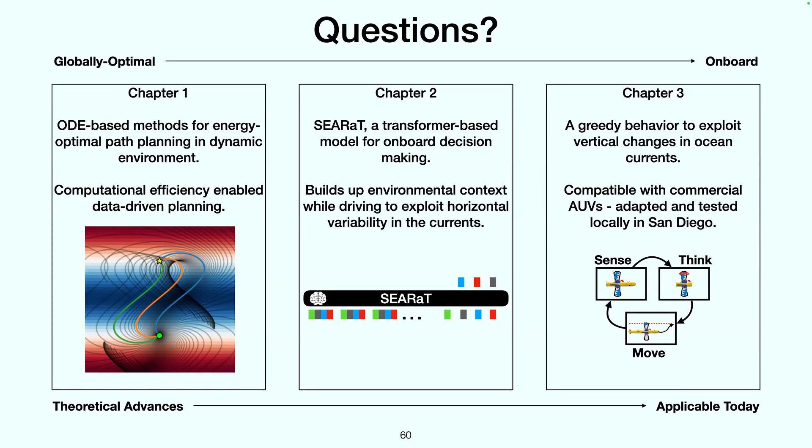Okay, now I'm going to ask Matthew, can you ask your question? Yeah, hi Ray, that was a really nice talk. I just had a question: for this size vehicle, can you always assume that the extra processing power is negligible as you evaluate some of these behaviors? That's maybe a simple question.

Hopefully the answer is yes, it's always negligible. But that got me thinking about this issue of whether to use only onboard sensor information versus a model nowcast or forecast that you could in principle get transmitted to the vehicle if you were willing to surface. So I'm wondering, did you explore any of that trade space of additional processing time versus gaining more information in order to optimize?